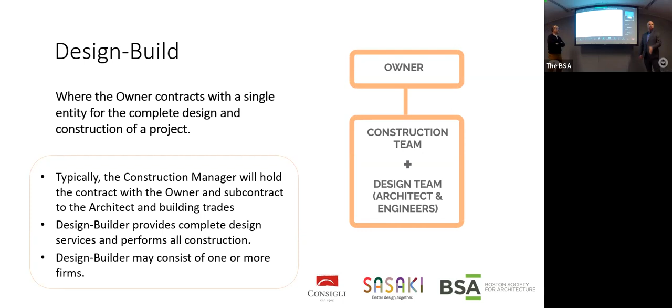So what we have here, just to set the record straight on the different types of delivery methods that often get used synonymously with each other, but are obviously quite different. Design build, this is the approach where the construction manager traditionally gets hired as the design builder, and then will subcontract to an architect, engineer, and then subcontractor trade companies to complete the work. So a pretty linear approach, one path, straight down.

Delegated design, this is where there's a little bit more collaboration in the relationship between the owner, architect, contractor, 2 separate contracts, one with the architect under the client, one with the contractor. But the architect will delegate a specific component of the design to be led by the contractor, whether it's curtain wall, structural steel connections, miscellaneous metals or stairs. There's a component that they will pass off and the contractor and delegated design contractor will take the lead.

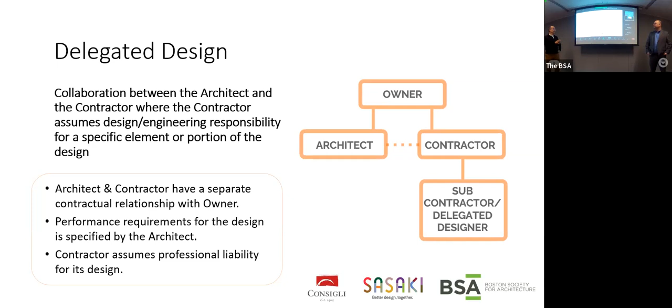So for delegated design, the architect's responsibility, since the contractor is responsible for the design, what we have to do is provide the performance requirements in the contract. Those are the guidelines that a delegated designer has to adhere to in order to meet the intent of the contract. But the design and liability is to the contractor.

And design assist. This is the approach I'm going to be talking about today, which is more of a collaboration between multiple parties to assist the architect or engineer in creating an overall design that they will own. This may lead into other portions that have a delegated design component, but ultimately the design itself will be collaborated together and owned by the architect.

Yeah, and so I have to admit, the confusion between design assist and delegated design mostly happens with the design team. I think the construction team are very clear. Exactly. But the design team, they think that design assist is delegated design starting early. So I've run across where some people expect the design assist contractor to start into shop drawings, start into engineering, and that's not the case.

In design assist, the architect is still responsible for the details, for the contract documents. The design assist contractor is there to help us develop those details, but we are doing the drawings, we are writing the specs for that system. Ultimately, it will go into delegated design, where the design assist contractor would take over the design, but until then, the performance requirements are on the design team.

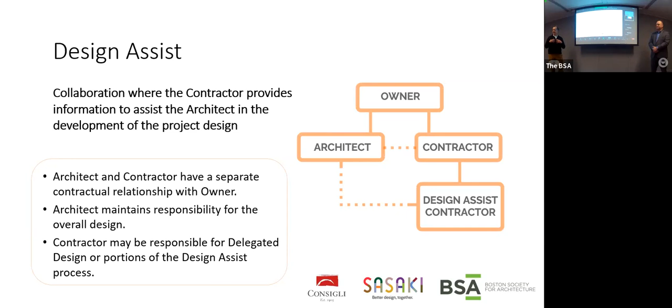When is design assist most beneficial? It's not a one size fits all approach. It's not going to work in every scenario. There are plenty of delivery methods out there. Some may be better suited than others. But when it comes to design assist, we found in our experience, the more complex the system, the more applicable it might be for a design assist approach.

So these are just a couple scenarios. I'm not going to go through them all. Again, complex custom assemblies, highly specialized, where the design may not be quite straightforward, that not everyone may have expertise in. You could value participation from outside companies, outside resources, and to get them involved early. But again, anything can be a design assist trade if it looks like it's going to be an environment where they could benefit from a lot of collaboration between different parties.

Defining design assist roles and responsibilities. Again, this is a bit wordy, so I'm not going to run through all of them. I won't put everybody to sleep, but some themes that you're probably going to hear throughout this presentation: design responsibilities, liability, and ownership. It's very important to establish those clear guidelines, roles and responsibilities very early on. Now, some people do it differently. We've found it's best to set up a matrix, have all the players, all the expectations and responsibilities, and assign those early on so people know what is expected of them going into that effort and the level of participation. That gets into the next highlighted item, that level of participation.

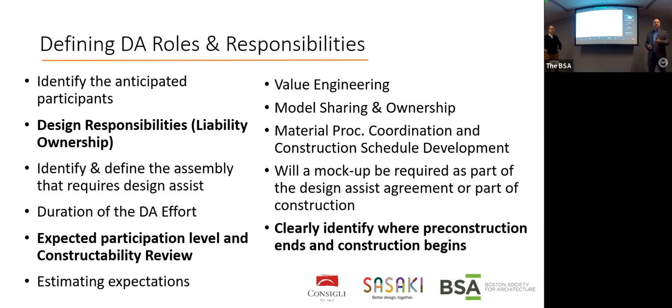And also at the end here, clearly identify where pre-construction, the design assist effort, ends and construction begins. It does have a tendency to blur the lines, especially if you have to start delivering or procuring materials as part of this effort. So again, with that matrix and assigning those responsibilities, make that effort clear. When is it going to start? When is it going to finish? When is it going to go into construction? Because they're often two different contracts. And they could, I'm not saying they do, but they could always be two different companies as well. One could be doing the design assist, one could be doing the construction. Unlikely, but it's possible.

Just some of the resources that people have when it comes to a design assist contract. Up until more recently, it's really just been a pre-construction tool using a standard AIA A133 contract, and then defining what the design assist effort is going to be with all those slides that we previously talked about.

More recently, the AIA came out with a design assist supplement, C403, actually from 2021. I haven't used it yet, but I've gone through it and it takes care of a lot of the legal boilerplate. It just leads the team to defining what that effort and participation is going to be. So it's a big help, a big time saver. You don't necessarily have to bring it to everybody starting from scratch with your corporate attorney.

So it definitely helps. And then ConsensusDocs 541 is another supplement. I have not used it, but other people have, and they say it is helpful at organizing the design assist effort contractually. So those are some of the tools at your disposal when trying to set this up.

So on to our project, the Harold Alfond Athletic and Recreation Center over at Colby College. Colby College hired Hopkins Architects from London and Sasaki to design a state-of-the-art athletic facility. That facility contained a 50-meter pool and aquatic center, performance gymnasium, performance ice hockey rink, nine squash courts, and a field house containing an indoor track, lacrosse field, batting cage, throwing cage, and a sports medicine suite.

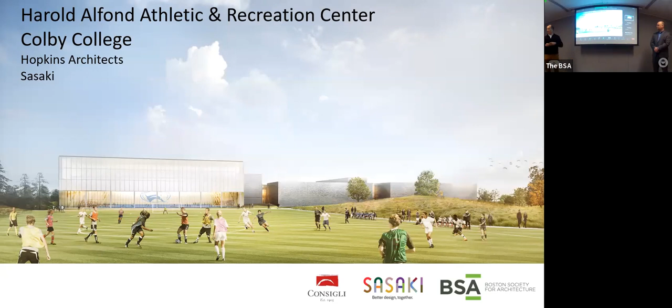The view you see here is what we're going to be talking about — the field house and the challenges we faced to deliver that.

The program that Colby had was really ambitious. They wanted to create a new gateway into the campus and a campus center for athletics, health, and wellness and recreation. The program was huge — almost 350,000 square feet, all enclosed under one roof. At the time of construction, it was the state of Maine's largest construction project.

Sustainability was a major driver in this project for Colby as well as for Sasaki. We were able to achieve LEED Platinum and SITES Gold, which is the site and land development sustainability goal. A lot of the LEED Platinum was based on the innovations we introduced in the design assist process we're talking about.

It was so large during construction that Colby was getting calls asking why we were building an airport hangar right off their main road. They were not happy about it, so they explained exactly what it was, and slowly the comments died off. But it was definitely much larger than everyone was used to seeing in that area.

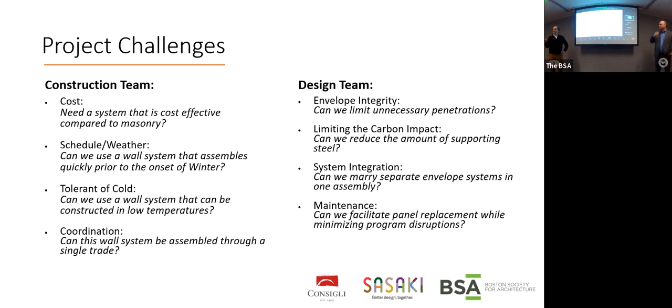That conjured up other ideas — aesthetically, we could set datums that tie into other portions of the building. We also had the idea that we could make the panels manageable enough that if a panel were ever to be damaged, the owner could simply remove the pressure plates and swap out the panels. And we loved the idea of having no penetrations through the building envelope.

And when we thought about it some more, we thought: can we take advantage of the inherent structural integrity of an insulated metal panel? Normally you'd have to support a panel every 7 to 8 feet back into structure. Instead, we thought we could establish a compression system where we deadload the panel at periodic locations and take the load through an extrusion into the building structure. That allowed us to increase the spans from 7 to 8 feet to more like 18 feet. So it was a pretty substantial increase in span, and still thinking no fasteners.

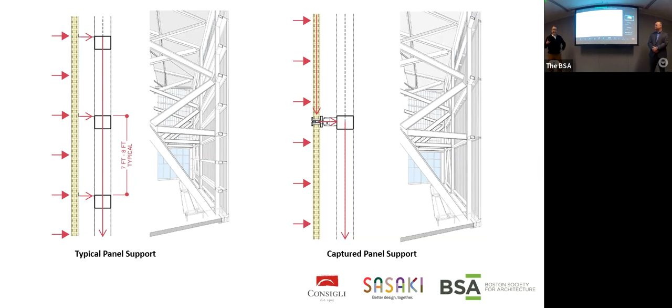This is even before design assist came on. We pulled together our design development package, which Chris used as the bid documents for the design assist contractor. We identified the stack joint as the critical component for the system. At the time we didn't know exactly what that would be, but we indicated a compression system where the top panel deadloads to it and transfers to the structure, and the bottom is laterally supported, which also allows us to integrate other systems.

So we had the opaque system of the insulated wall panel. We also had a fiberglass translucent panel used as a clearstory system, and we wanted to integrate a curtain wall. At design development, we weren't thinking we could integrate all these components together, so we kept them separate. We have the stack joint, but this extrusion stops at the head and the translucent panel picks up, and everybody's responsible for their own components.

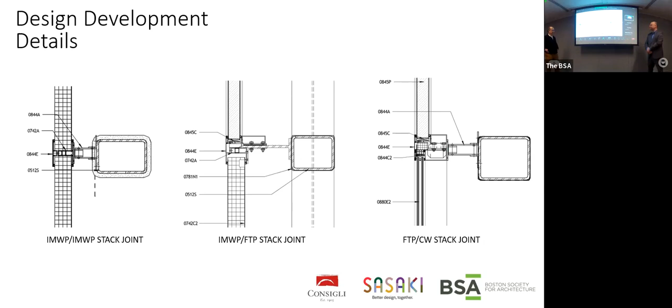So why did the project require design assist? As we mentioned, this was heavily custom. The extrusion that Jerry and Sasaki were talking about is custom. A standard insulated metal wall panel system has very few components and is meant to be supported every 6 or so feet, but if that was the desired aesthetic on the inside, it wouldn't be desirable. Understanding Sasaki's intent to eliminate that substructure and do it at major 12-foot intervals, we were going to have to do something completely custom.

We had to integrate multiple manufacturers within someone else's system. Unlike doing a delegated design where we don't necessarily know how to do it but the contractor and manufacturers have expertise to figure it out, in this case it would be circular—it would just keep coming back around. Well, I need this from you. Well, I need this from this other person. It would be too much information to resolve linearly in a traditional delivery method, since so much needed to be resolved together.

Obviously there were high performance expectations. Constructability was a big concern, as we pointed out—where to draw those lines of ownership. And equally important was the overall aesthetic that Colby, Sasaki, Hopkins were desiring for the field house. As I said, traditional bid-build wasn't going to do it. It would have added at least 6 months to the project and would have been much more adversarial. We also needed real-time cost information—we couldn't roll the dice on something custom that no one's done before.

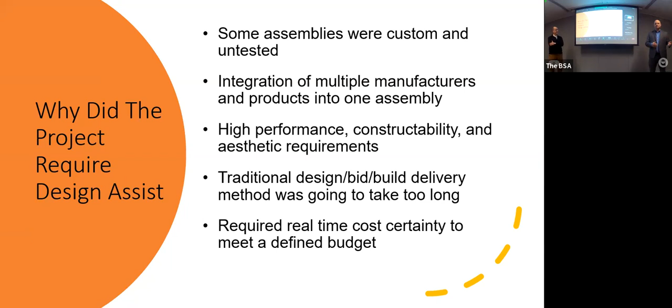We needed real-time cost information on what we were designing at the table, within a couple of days afterward, so we could make sure we were still on budget and on track, or recorrect and go in another direction. Those were the challenges we faced, and these are the players we had. This organization is very similar to a traditional CM-at-risk type contract, but trying to design through this process in this form would be very cumbersome and would take a long time.

Sasaki working with Arup, working with manufacturers, Kingspan, who's the insulated metal panel manufacturer, Major Industries, who was the translucent panel manufacturer, and Schuco on the curtain wall. They would have thoughts, ideas, and that would come back up and around to Consigli. Consigli would then feed that back down to Total Wall.

Total Wall would feed that to Cherry Hill Glass, one of their glazing subcontractors, and their own labor force. They would come back and say, well, that's not going to work. We have a bunch of RFIs, we have cost concerns, this isn't going to work. And then it goes back up and around. It just keeps going like that.

An RFI could take at least a week to get, or we could be at the same table. Is that going to work? No, it's not. We need to think of something else. So those were the people involved, that was the contractual relationship. But with the design assist approach, all those players were sitting at the same table at the same time. It was immensely efficient and productive.

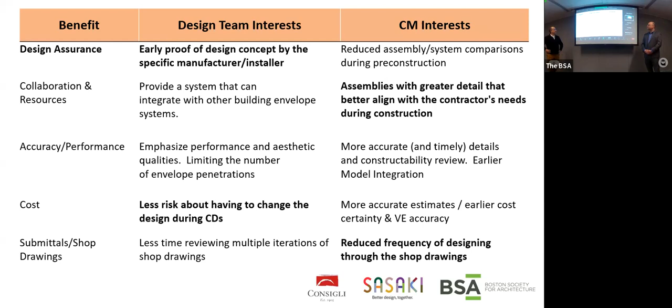Procurement and supply was important for us, the contractor. We needed to make sure that we had the ability to pre-purchase some of the custom fabrications. Again, they're not coming off of a standard assembly line. We were going to have to schedule for some of these custom extrusions to be built and delivered. That was going to take more time. Waiting until the end of the procurement process to do that would have pushed everything way out. So this way we were able to overlap some of that time, and it blended right in with the rest of pre-construction and the tail end of design, beginning of construction. We didn't lose any time.

For the design team, the fact that we were able to follow up with some quality assurance testing, performance mock-ups, something that we normally wouldn't see during the design process or after we finish design and go through delegated design. We've kind of lost the opportunity to have a performance mock-up. With design assist, we're able to sort of front load that design, get to a point where we're comfortable that in our minds we've proven out the design, and we're able to go to a performance mock-up to actually test the design. Beneficial to all parties was fewer changes.

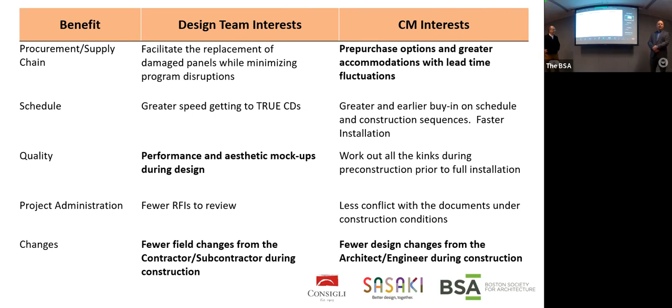No one benefits from changes, absolutely no one. Subs don't want them, contractors don't want them. Client doesn't want to pay for them. Design team doesn't want to issue them and go through the obvious effort of having to produce them. By having everyone at the table, I can tell you the subcontractor and the contractor are going to be in a pretty difficult spot if we were to have to go to Jerry or Colby and say, well, we need a change for something, because their answer is always going to be, you were right there at the table, what's the problem? So it really takes away a lot of that risk. I think through the project we had very few changes when it came to the envelope system.

By this time, Consigli had signed up Total Wall Systems out of Connecticut as the facade contractor, who owned the insulated metal panels, the fiberglass translucent panel, and the curtain wall—one contractor controlling all three envelope systems. They recognized that the stack joint was key to this design, and in our meeting, Total Wall brought in Kingspan and Major Industries for the translucent panels, all sitting at the table together to see how our respective systems could work together.

Kingspan's engineer was at the table with a laptop and CAD system, and generated this extrusion from the discussion. The performance requirements that extrusion had to adhere to became sort of our basis, our key.

More interestingly, this came not from the design team but from Total Wall. Initially we were thinking 2 3/4 inch fiberglass insulated panels, taking the extrusions they use and setting that into this extrusion. Major Industries said we've got a 4-inch panel, sort of the same thickness as an insulated panel—why don't we just glaze into that system? So now we've removed a redundant metal framing system, and we've got two different envelope systems going into one extrusion.

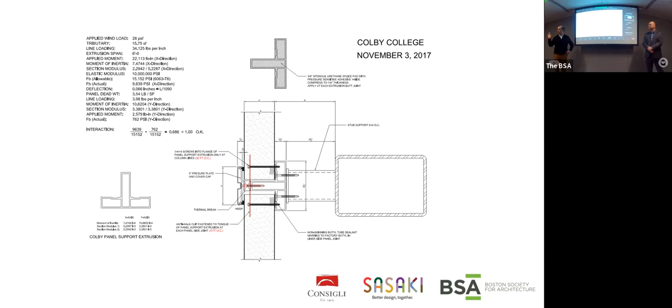So a little compromise has to happen, which is sort of the nature of design assist. We reduced the penetrations a lot, but in the end they had to sink a screw in just to hold the panel in place.

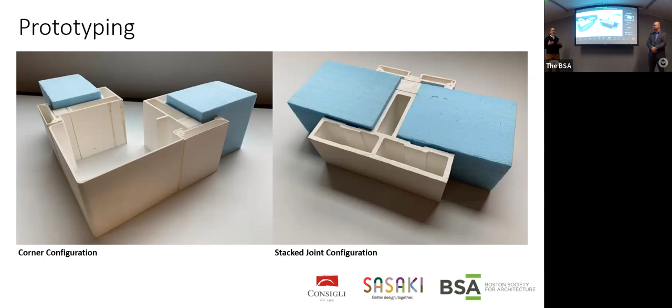Once we had that extrusion, the design team took it over and figured out what iterations we could do to modify and use this extrusion. We had a T shape, and we developed an L shape to create corner conditions and jamb conditions. So now we had the parts and pieces we could put together and integrate into our details.

From our design development—our naive desire of a compression system—we now have a fully developed construction document set that can go out into the street and actually be priced, because everybody understands what the responsibilities are. We're able to control sequencing to get all the necessary tie-ins into the system and work out details that aren't necessarily critical to the success of the insulated metal panel, but have architectural significance.

We had this C channel that defines the cornice of the building and ties everything together. Working with the contractor, we were thinking get a C channel, hammer a clip on it, put a tab on it, call it a day. The contractor said no, let's custom extrude it so we can get the actual clip and flange that we need, that won't go on site.

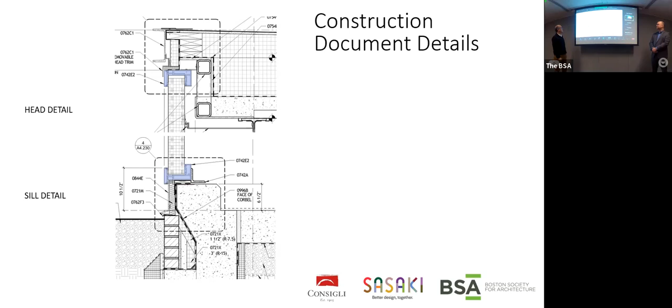The stack joint system shows how that one extrusion can marry the insulated metal panel with the fiberglass translucent panels. But in the end, curtain wall was its own thing. We were able to make that separation and integrate it, but we weren't expecting the curtain wall system to be engaged with our extrusion.

After we went through the majority of the design assist portion, we said, alright, we think this is going to work—why don't we run some of the custom extrusions and produce a performance mock-up. At this point we've gone through not just the compression fitting we're highlighting here, but the base, the intermediate, the transitions, the head, around doors. There are probably about another dozen or so assemblies that we worked on together and worked through.

But this custom extrusion had a long lead time, and we had to get it there so we could go through the rest of the steps, test it, make sure it's going to work, and get any bugs out of the system before we start putting it up on the building. So this is just some shots of the actual extrusion.

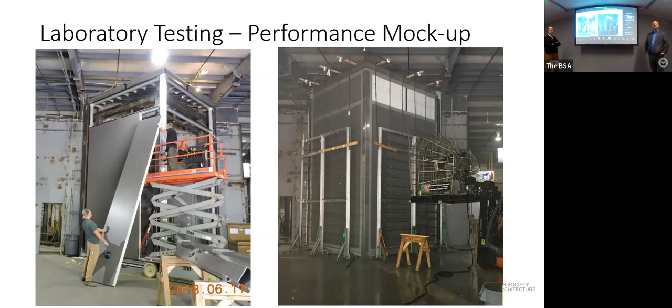Now, I'm not saying it's raining on the other side of that, but clearly there were problems with the test chamber, just air migrating around, and some fine tuning that we needed to do with the mock-up in order to get everything just right. So we ended up having, I want to say, at least three tests, maybe more.

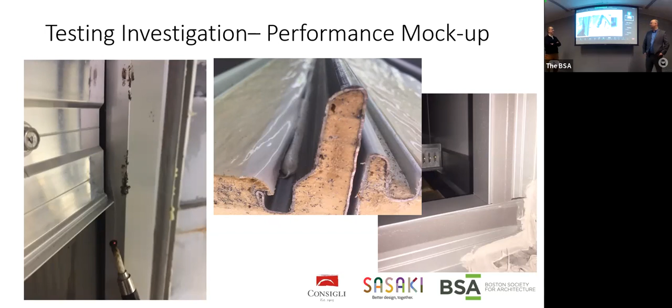So Total Wall said, okay, we're not gonna 100% rely on factory butyl. We're going to install our own, both at the base and at the vertical lip, and then again on the seams. Over on the far right, there's a gasket, a compression gasket that was used, and you can see where it starts to travel off and not have a good seam, even though that's compressing, there's just a little gap where air can come in. That had to be fixed.

Ultimately came away with modifications or some supplements to the extrusion. Ultimately minor, but the weeps, see here, that were drilled into the pressure plate of the compression fitting were too small and too far apart. There was too much water being introduced into the system, and it couldn't handle it, and that pressure was causing the water to push out the backside and up the vertical leg. That's not going to work.

So bigger weeps closer together, and then also introducing a foam compression fitting on the horizontal and on the vertical prevented the butyl from sagging or oozing out, kept it where it needed to be, so it wouldn't over-compress and then fail under extreme temperature conditions, which we also had to test. And then also using butyl and foam tape over the screw penetrations, because we were still getting some air even through that screw that was causing us to exceed the threshold.

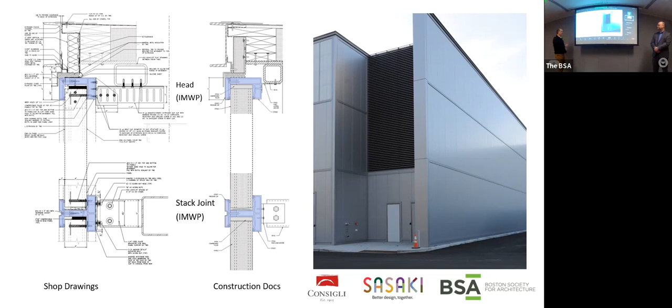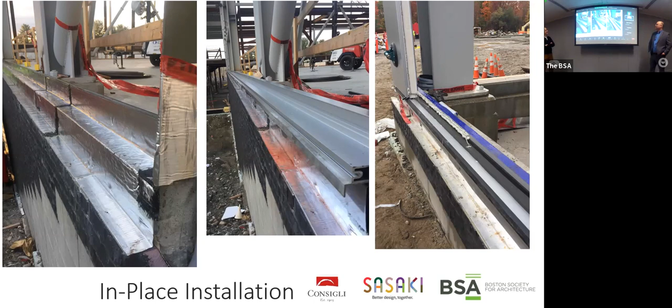Again, this is that foam compressible filler that was added. There's also one on the vertical, just to keep that butyl from oozing down into the flat. But that's pretty much how they went together. They went up very fast. Again, we started with the field house, and I think we had this assembly on 3 sides of the field house, and 2 sides of the ice rink. And the head condition we had throughout, across multiple different systems, including masonry.

But the insulated metal panels really went up in a matter of weeks. The wall was done. There were trims and things like that. As you can see, this is an aesthetic trim that was, say, glazed into that extrusion at the base to finish the detail off, but they went up very quickly. We were very happy about that. That's what we were shooting for because we had to get these up before the snow really started flying in the field house so we could complete the rest of the work.

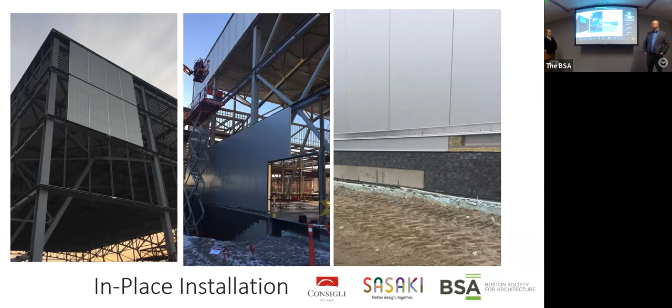True. But no, this went up, we started it in the fall. I think we tested it right before Thanksgiving. So it was great. And I think we had one failure in the field house. That was a gasket that was out of place. The panel came off, corrected, put back on, retested, and it was fine. So this, again, Intertek was the third-party company that Colby College had hired to do the independent testing.

And it went through the same parameters that we had to do in the performance mock-up. So nothing changed. This is just some examples of where we had tested the curtain wall system. But we did static tests and dynamic tests on multiple systems.

And in addition to the performance mock-up, we did what we called an aesthetic mock-up, which is what you see on the upper left. That was taking all the various components, the masonry, the curtain wall, insulated metal panel, translucent panel, and slot system, and incorporating them just to make sure that everything came together. We knew performance-wise and functionally it was going to work, but we still have to marry up some of these details architecturally. So we did use that. That was a good learning tool, but definitely got much more out of the performance mock-up earlier on. Very glad we did it.

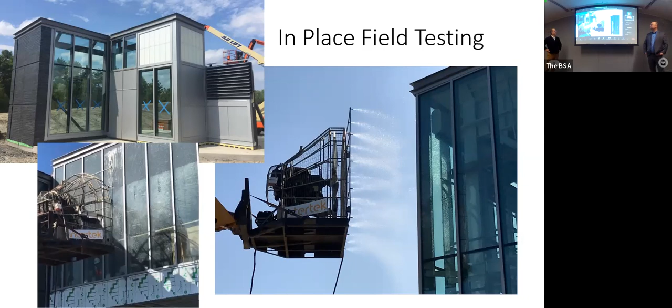So overcoming challenges of design assist. Again, it's not perfect. The more you do, the better you get at it. But first and foremost, the question we get is, well, how are we going to obtain competitive pricing? How are we going to keep people honest if there's only one company that's at the table? They can just name their price.

Well, we overcome that by competitively bidding the design assist effort with subcontractors. After that competitive bid, we chose to enter the subcontractors into a guaranteed maximum price contract. So they were then obligated to competitively bid all the work they weren't going to do themselves. All their subcontractors, all the material suppliers. So we got to see their competitive bids to make sure that we were still getting a competitive edge. So that took away 90% of the competitive pricing concerns.

Added upfront costs in the process. Yeah, there's added upfront costs. Design assist is not free. You're bringing more people to the table earlier on. That's going to have an added cost. However, the alternative is you play the whole process out, which, as I mentioned before, would take quite a lot of time and spend a lot of money. So it's a bit of a leap of faith going, trust us. If we spend this money now, you will have saved it at the end.

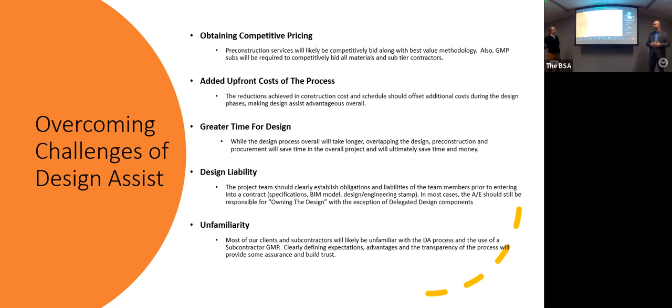Great. That's it. Well, thank you so much.

Talk to us about the time commitment to design meetings. What do you guys budget for meeting with these contractors? Once a week, couple hours? I think we met weekly. Yeah, at least during the start. There was obviously a lot of work that had to go into understanding the intent that Sasaki and Hopkins wanted to achieve, and then how to go back and figure out how to make that work with standard assemblies, and then later custom assemblies, make it all work. So, but not every week.

Yeah, I think it started ramping up when we developed the extrusion, because once we had that piece, the design team needed to go back and sort of understand what we had. So we had to test it out in the building. And then when we were comfortable with how we wanted to treat it, that's when we really went full bore. And when Chris says weekly, it's like weekly all day in Milford, with everybody at the table. And we'd just go instance to instance to instance, from the base all the way up, and vice versa. It was that, how do you eat an elephant? One bite at a time.

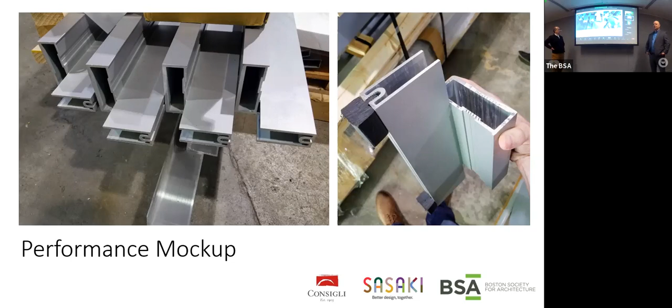I have a question related to the extrusion from Greta. She asked how the team addressed a thermal bridge at the framing of the captured panel systems. There's a big fat black block in there between the pieces -- can you go to the photo of the extrusion, somebody holding it up? That's the thermal break in there. It's continuous right through the system, and it's screwed in. There's also, on the back side of the extrusion, between the extrusion and the outrigger, pads that gave a thermal break between the steel and the extrusion. So we tried to build in as many different breaks as we could.

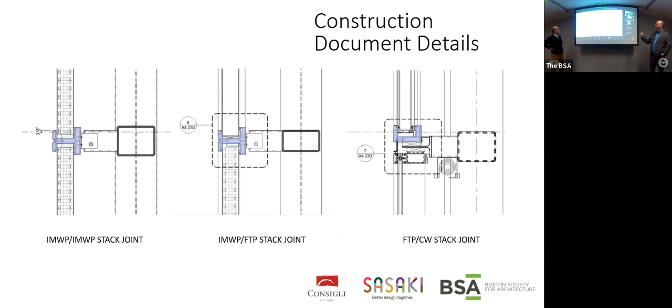If you go forward, there might be a shot of it on the actual steel. Keep going -- the ones in the other mock-up. Back up. You can see some of these are the outrigger plates. On the back of those plates we had a thermal break there as well.

You ran the physical testing, and I assume you also did theoretical testing. Yeah, we had Era in charge of doing that initial testing to make sure we're on top of it, but Total Wall had an obligation too -- they did thermal testing and analysis on their assembly. But then as you get to the base and the head, there are other contractors at play. Total Wall said they'd thermally test their own system, and I think they even opted to test the upper and lower as well, but they said they didn't design those components -- they designed and assisted with it, but own the delegated design for the extrusions and everything in the middle. Era also participated in some of those thermal models after the design assist process; no details were left out.

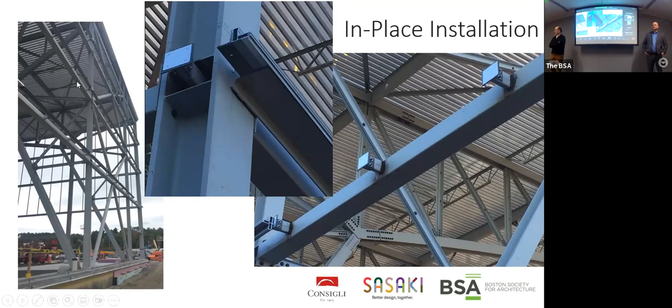You sort of just answered this question - you said you did shop drawings for the mock-up, but shop drawings didn't come after the design assist process. They're going to be subject to project specific engineering and all this, but as part of your design assist contract, did you specify - because it kind of looks like it did - that certain typical details would have to be resolved to a shop drawing level in the design assist process, or did that only happen through the necessity of producing the proposal?

Is this it? Yeah. Consigli had worked with Sasaki, Hopkins, and Eric to a point, to develop the details, which is what Jerry had said before. Beyond that, we said, we can't completely define in detail what this thing is, where everything comes together, without bringing on more specialty trades, engineering and all that.

And then as part of our process, we defined what the expectations were going to be. We need this thing, this assembly, that assembly - we need those detailed enough where you could then go into shop drawings for the building, and at that point your GMP would take over. So the overall requirement and the cost for that requirement and the time, the schedule for that requirement was dictated as part of the design assist contract.

And then equally, their GMP picked it up from there and said, all right, everything before this is design assist, everything after this is GMP.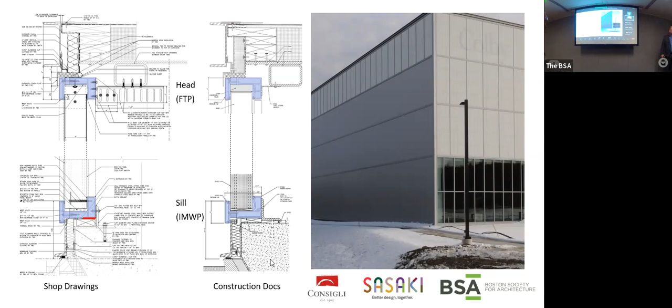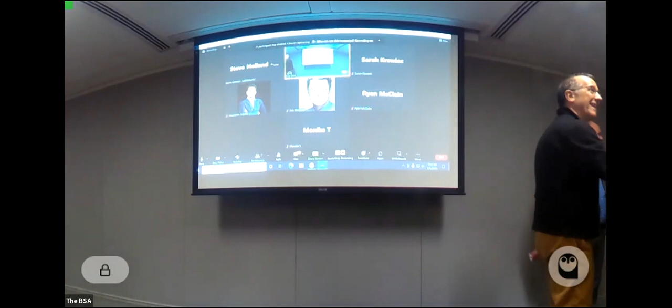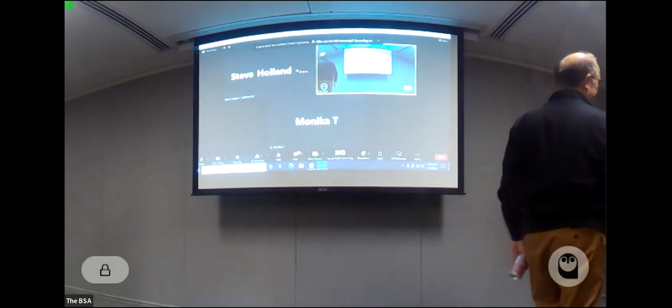Okay, so we had 25 people on the line, 25 people in the room, so that's a lot. We should have, like, offered that as well for the next one too.

Yeah, right, feel free to head out, do what you need to do. Are you going to be in the office? Okay, I have a site visit that's tentative.